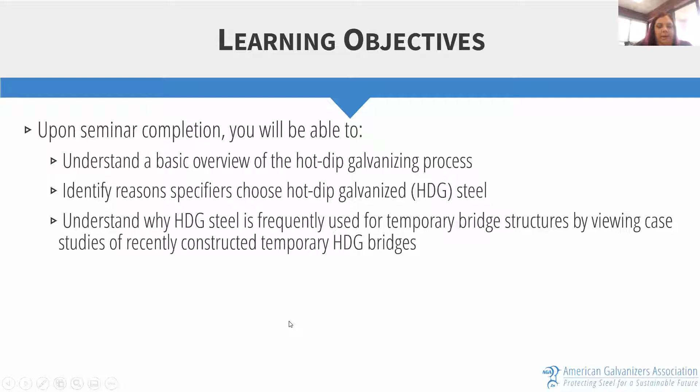It starts with surface preparation done within the galvanizer's facility. There are three major steps in surface preparation: degreasing, which takes off organic compounds; pickling, the primary cleaning mechanism, a mild acidic solution that takes off all mill scale and oxides - basically when it comes out of that bath it's at a near white metal clean.

Then the final step of surface prep is a flux solution, which does any final mild cleaning of contaminants on the surface since it was removed from the pickling bath, and more importantly puts a protective layer on the surface so no contaminants will form before going into the galvanizing bath itself.

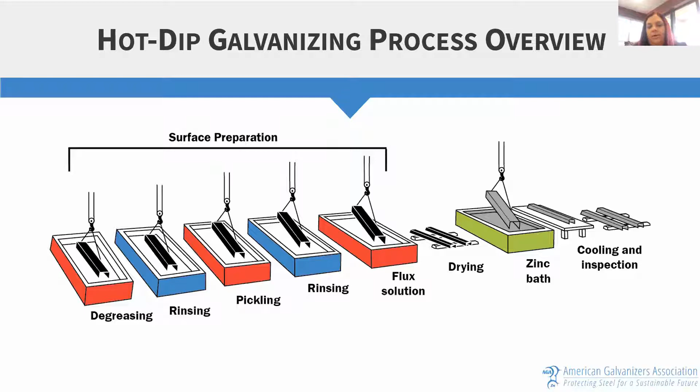A little bit about the galvanizing bath: it's heated to about 830 degrees Fahrenheit, required to be at least 98% pure zinc. The 2% of additives has limits but is to the galvanizer's discretion - the most common you'll see are aluminum, bismuth, and nickel, which help with things like the fluidity of the zinc, the shine of the coating, and controlling the coating thickness.

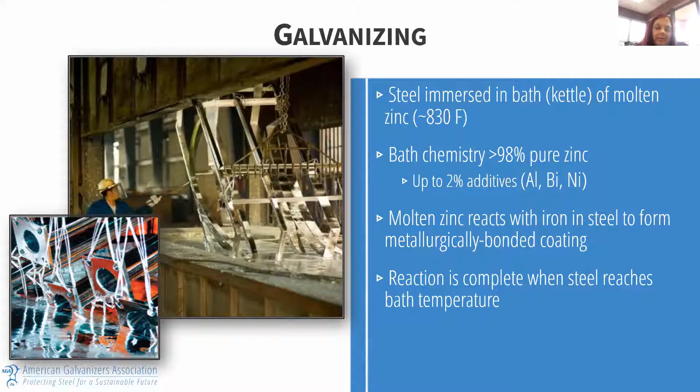While it's in the galvanizing bath, it stays in there until it reaches bath temperature, typically about 5 to 7 minutes. The kettle operator would know when the steel has reached bath temperature because the bubbling on the surface would dissipate. While it's in the kettle, there's a metallurgical reaction between the iron in the steel and the zinc to form the galvanized coating, which we'll talk more about as we go forward.

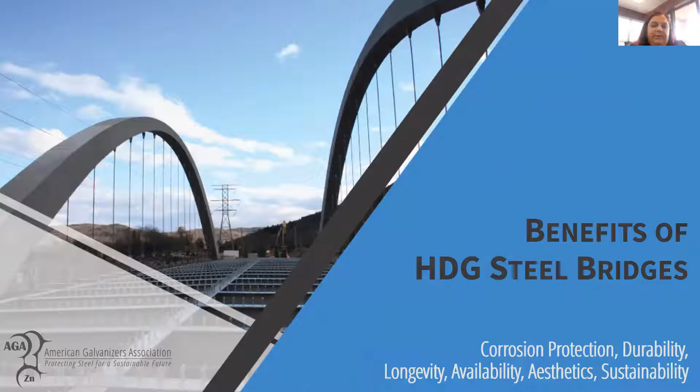So what are some of the benefits of using hot dip galvanized steel in bridge structures? We're going to talk about 5 or 6 big ones here, and we'll try to relate those to the temporary bridge structure as well.

As we talked about at the beginning, the biggest or most common reason hot dip galvanized steel is chosen is for its corrosion protection, and it really provides 3 levels of protection. It provides basic barrier protection that any coating would provide by isolating the steel from the environment. But more importantly, it provides cathodic protection, meaning the zinc will sacrificially corrode to protect the underlying steel - as long as there is zinc on the piece, it will corrode and prevent the steel below it from corroding.

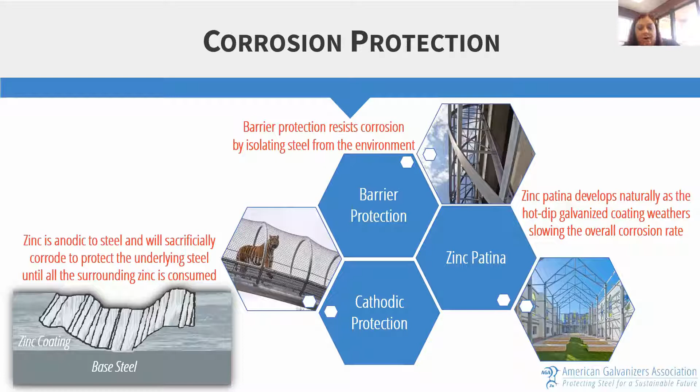But the real longevity of galvanizing comes from what's known as the zinc patina. This develops naturally as galvanized steel is exposed to wet and dry cycles in the environment, producing a series of byproducts on the surface - zinc oxide, zinc hydroxide, and zinc carbonate - which slow down the overall corrosion rate to about 1/30th the rate of steel in the same environment.

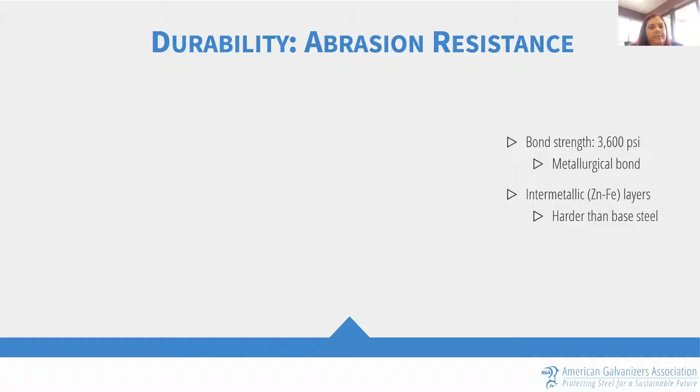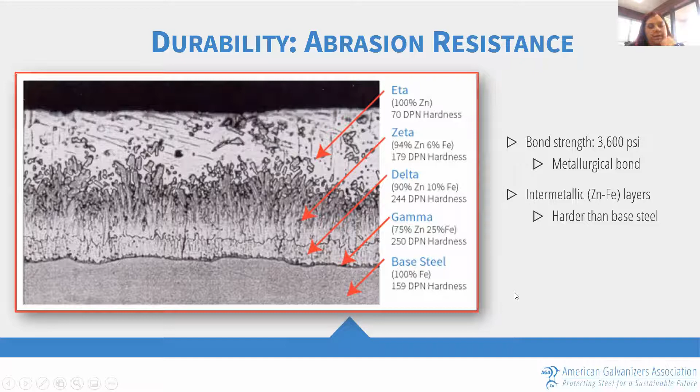Another benefit of hot dip galvanizing is its durability. There are a few different areas within durability that come into play. The first is its abrasion resistance. This has to do with the fact that the galvanized coating is not just a surface coating on top of the steel, but basically becomes a part of the steel and is intermeshed with the iron of the steel. This photomicrograph shows that the layers of the galvanized coating are a combination of zinc and iron. So we're not just sitting on top, but we're now intermeshed with the steel itself. That provides great bond strength, and the hardness of the coating is actually harder than the steel itself. So it's very difficult to damage, very difficult to hurt the coating or cause any sort of damage that would allow the underlying steel to be exposed.

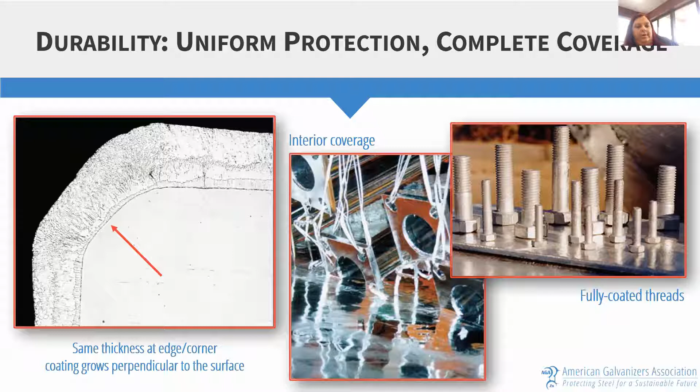Another part of hot dip galvanizing's durability that's important to understand is that it provides uniform protection and complete coverage. What do I mean by that? Well, basically, hot dip galvanized coating grows perpendicular to every surface of the steel. That means any of the corners or edges will have the same thickness as flat surfaces. Any interior areas, if it's a hollow structure, or threads of a coating, are going to be fully coated. So there's really no weak point for corrosion to begin or to attack the bridge.

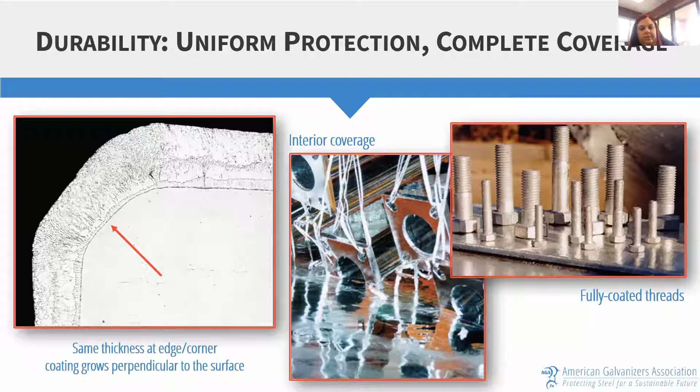As I mentioned at the beginning, a lot of the reason to use hot dip galvanizing is for its longevity. Even in a temporary structure, this could become important because sometimes our best laid plans don't work out how we expect. Maybe we thought the bridge was just going in for 5 years, but it could end up being there for 20 or 30 years, depending on the situation.

One of the advantages of using hot dip galvanized steel is that basically you pay for it up front, you put it up, and you can more or less forget about it. So if it's in a remote area that's difficult to access, you really don't have to worry too much about maintenance or closing it down.

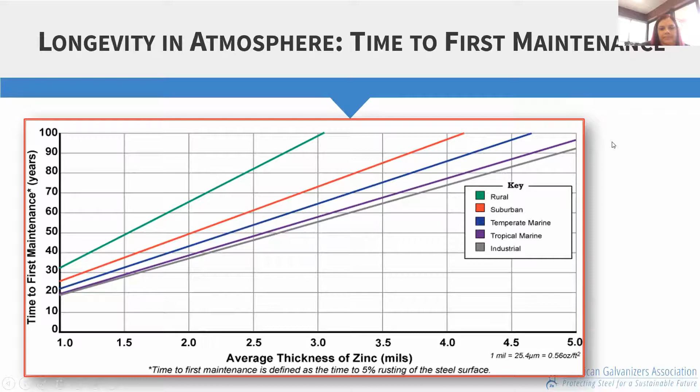Speaking with a group of folks involved in the forestry service, I know that sustainability is an important part of what you do and what you consider every day. So one of the things I like to talk about with galvanized steel is the environmental advantages it provides.

One of the biggest things, or the thing I like to start with, is that galvanized steel is made of natural and abundant materials that are essential to life. Zinc is the 24th most abundant element in Earth's crust, and iron ore is the 4th. So they're readily available to us and able to be used for this type of construction.

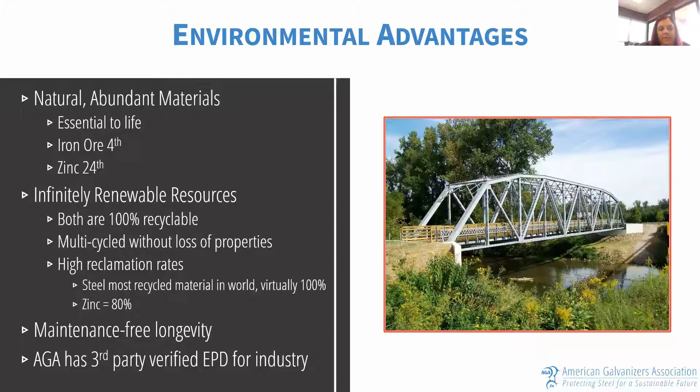In addition to those two major environmental items, that maintenance-free longevity we just talked about is also great for sustainability, because there are no VOCs or emissions coming off of that bridge while it's in place. There's no maintenance, so there's no need to bring out vehicles or other things to disturb the environment while it's in place.

If you wanted to get an idea of the life cycle of hot dip galvanizing, this is basically an abbreviated chart that shows you what you get. All of the raw material and energy input, or environmental impact, is really isolated in the production of the bridge.

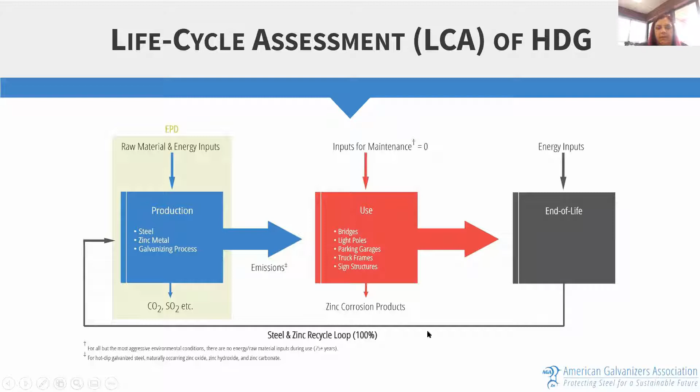When it's in use, there's usually no input for maintenance, no emissions coming out of it. It can just be out there for 75 or more years, particularly in a rural environment easily 100 years. A little bit of energy is needed when you want to demolish the bridge, but otherwise it just sits there and does its job. And when you take it down, it's 100% recycled, looped back into production, with no waste of materials.

Finally, there's a lot of versatility with hot dip galvanizing. First, it's important to understand that it's a factory controlled process that can be done 24/7, 365. There are galvanizers located throughout North America ready to help service this and provide the coating, so there's really no issue with turnaround time. We don't have to worry about temperature, humidity, or anything - we can just produce.

We talked about the abundant materials. It also provides some efficiency and safety, just as steel would in any case, but you can do more with less - the strength to weight ratio of steel allows you to span a longer length without a vertical column, things like that. So it really provides design flexibility for intricate areas where you're trying to build a bridge.

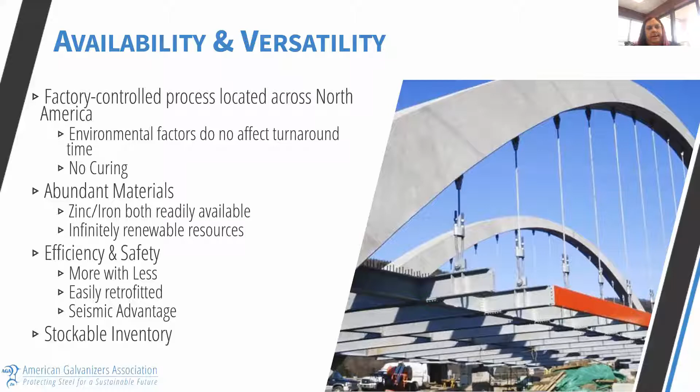But one of the best examples of galvanizing versatility is the last case study I want to show you - a 2-for-1, if you will. This is the former Fore River Bridge in Quincy, Massachusetts, put in 2002. The existing Fore River Bridge had serious damage and was actually closed to traffic because of it, or needed to close because it was not safe anymore or couldn't pass inspection.

Of course, this is a common byway and it was very necessary to have the connection there. So they used an Acrow structure to put up a temporary bridge to bypass this area until the permanent structure could be constructed. This was in place for about 15 years, giving you an idea of how long it took to decide on a path forward, demolish the existing bridge, and build the new one. If it weren't for this temporary structure, it would have been a very difficult 15 years for folks in the area.

But what's even more impressive about this particular structure is that in 2019, when this bridge was no longer needed and was going to be deconstructed, Jay Cashman, whose headquarters is right next to the edge of this bridge, decided to take all of the steel instead of having it trashed, recycled, or demolished. They took all the steel pieces, brought them onto their yard next to the bridge, and are now reusing the steel to build bridges for underserved communities free of charge.

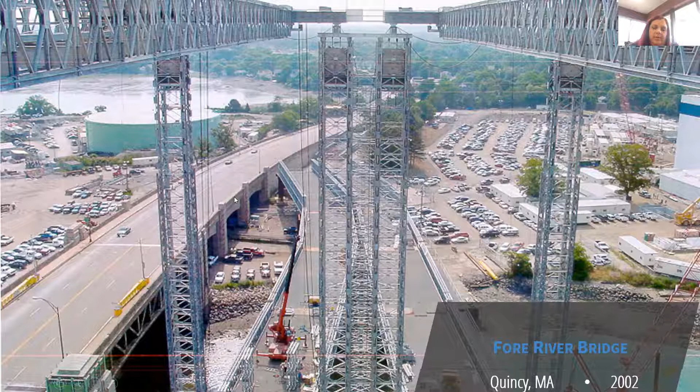So let's take a look at this video that shows where the new life of part of this Fore River Bridge is now. See if my video will queue up for you here.

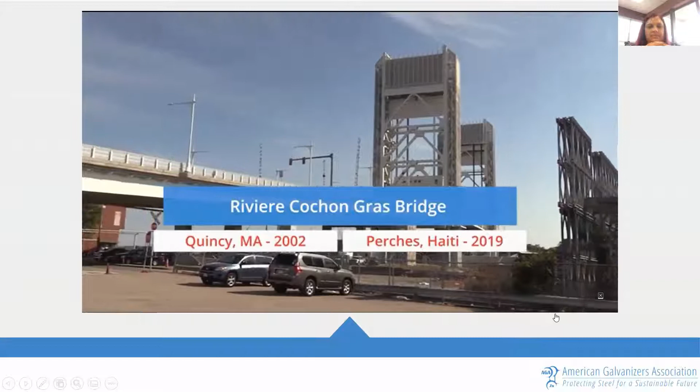My name is Jay Cashman. I'm the chairman of the board of Cashman Companies, located here in Quincy, Massachusetts. The company was started by myself in

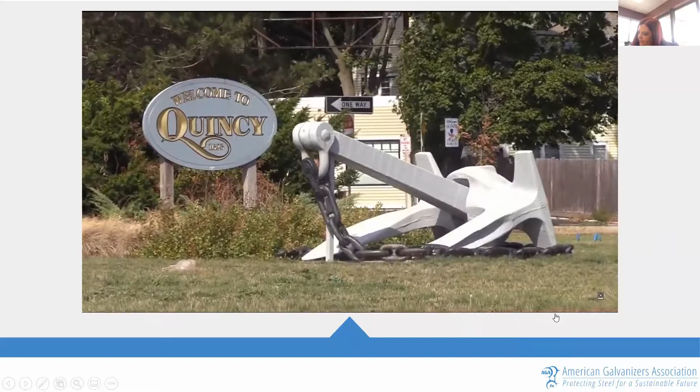about 1970, when I was in high school. Over the years, we built it into a multidisciplined, heavy civil, marine, dredging company.

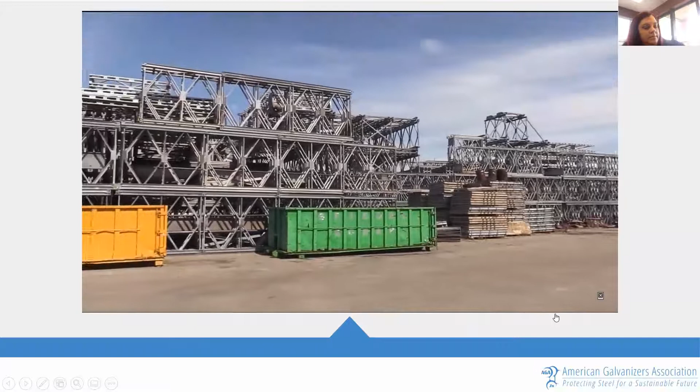We had basically done the demolition on the Fore River Bridge project, and there had been an Acrow bridge there for many years, so we had the demolition contract to take down the temporary structure and the remnants of the former bridge. The project was actually next to our headquarters. I kept looking at this bridge, and I said to myself, we have to find some sort of repurpose for it.

It had been scheduled in our estimate to just demolish it and send it to the junkyard to get the value of the junk. It was amazing - big, very heavily trafficked bridges were made of these structures, which I had like 2 miles of.

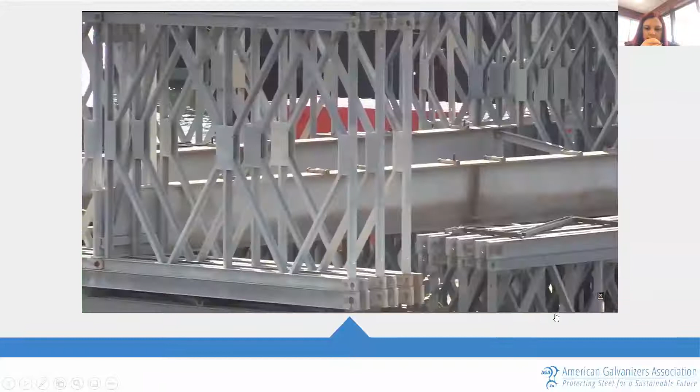I think it takes a lot of courage to actually get down there and get your hands dirty. Going down to Haiti and seeing people in poverty, maybe an abject poverty, the greatest poverty I've ever seen in the world, I said to myself, okay, maybe this is what I'm supposed to do.

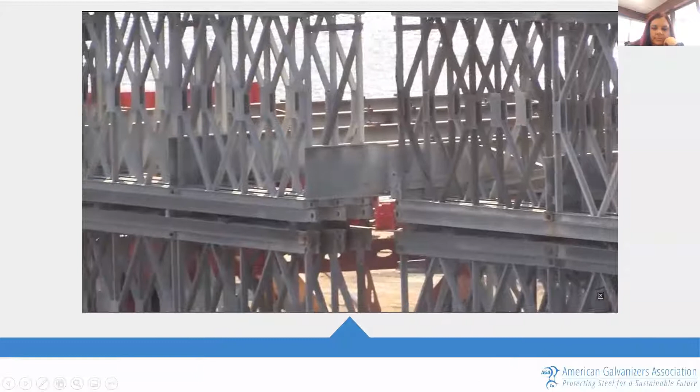So off we went. My name is Liz Turchia. I'm a project manager at J. Cashman Inc., and I am the co-director of the Cashman Family Foundation.

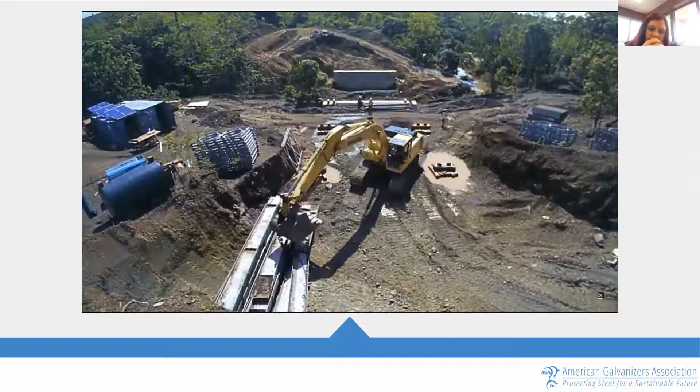They came into possession of all of this - several thousand linear feet of Acrow bridge - and in deciding what to do with it, we thought the best thing to do would not be to scrap it, but to use it again, because it's still totally serviceable. It has a lot of life left.

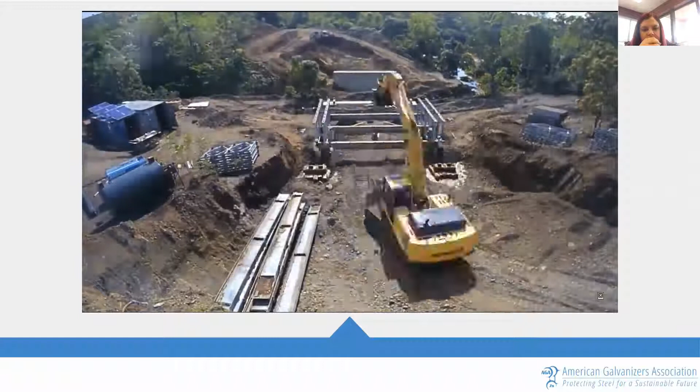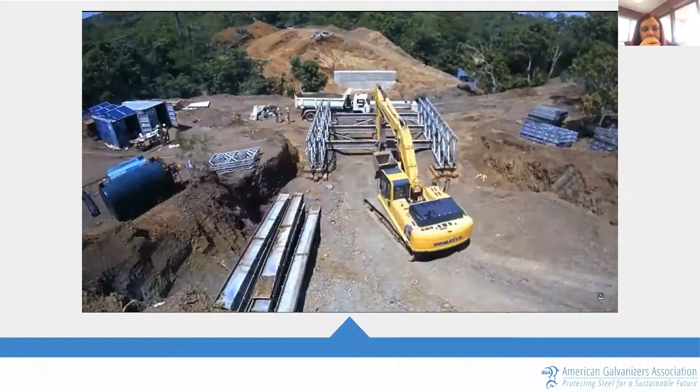So through our connections and our friends who already do work in Haiti, we got connected to some parties down there that are interested in infrastructure development, and that helped us develop the concept that became the Cashman Family Foundation. We're really kind of looking for places that'll never end up getting any attention.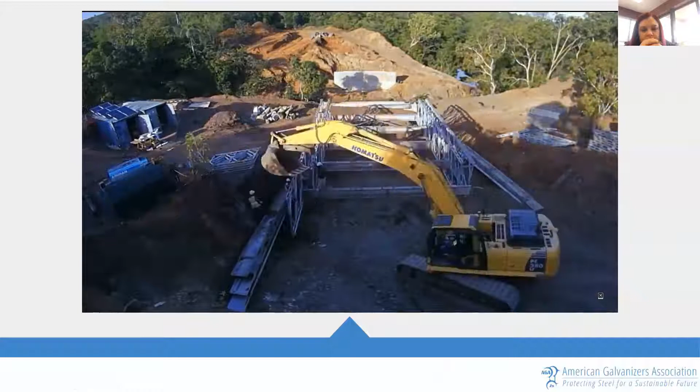That's kind of my goal at this point. That was on nobody's radar, and Liz found that opportunity. They've helped me navigate the social, economic, political dynamic of Haiti, which is, let's just say, complicated. At the very least, it's really complicated.

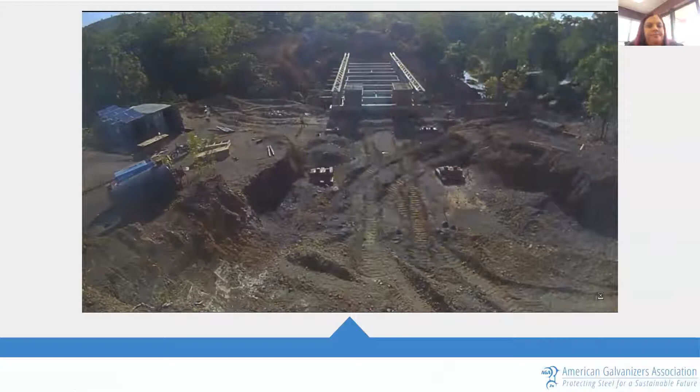Nobody's ever going to help these people, and this is something that I can really feel that we accomplished something. One of the compelling reasons to promote this program, or to keep these bridge sections as they were, was the fact that they were galvanized.

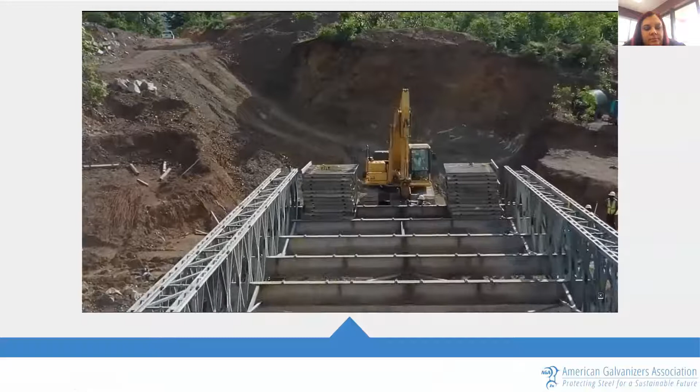Even after 20 years, there's very little delamination, there's very little oxidation that's taken place. The galvanizing stuck on it. Whoever did the job did a really good job. These bridges are just as good as they once were.

Generally speaking, I think that they're in excellent condition. It's amazing. I'm familiar with galvanizing from back in the 60s when I first started building bridges, and everything had to be hot dip galvanized, and it wasn't that way before.

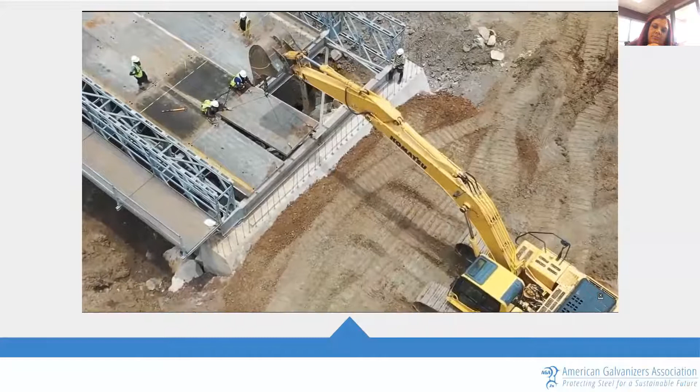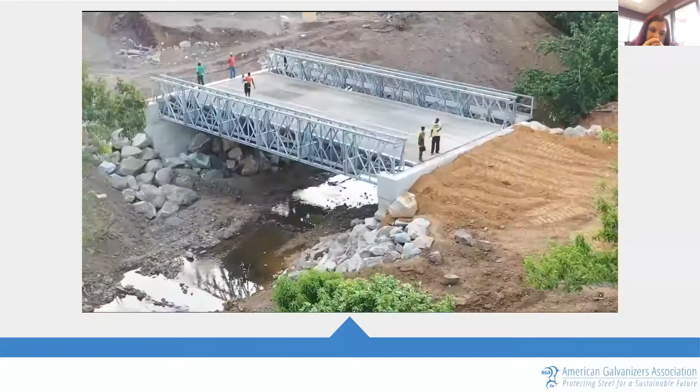And piers and all the bolts that we had were galvanized. We can go back to projects that we did decades ago, and you could still back those bolts off. And the fact is, if I was concerned about that galvanizing, I would have basically just sandblasted and repainted it - okay, I'll re-galvanize it, whatever - but the galvanizing was good.

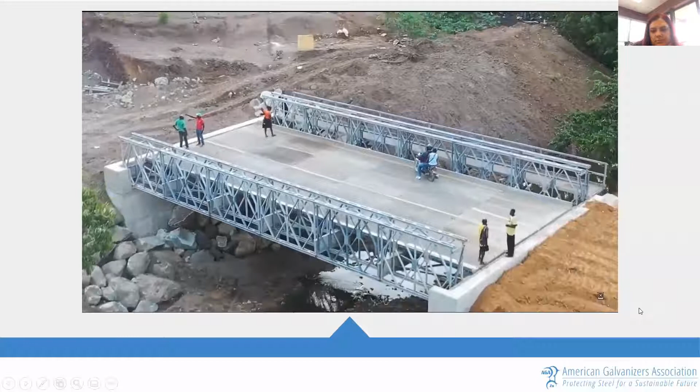I think that they'll get another 30, 40 years out of this thing without really much in the way of maintenance at all down there. My experience with galvanizing over the years, particularly around marine structures - it really kind of changed the world.

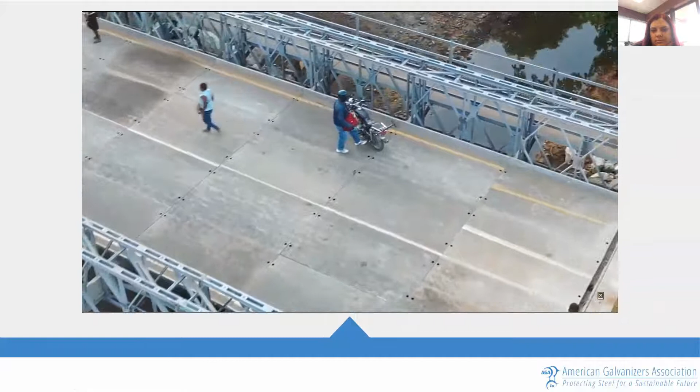So that's kind of the end of my presentation. I like to finish it off with that video because I think it really shows the opportunities for temporary structures and the reuse of galvanized steel.

So even if you were to put in a structure that you only needed for a few years, if you build with these modular structures that many of the manufacturers of the Short Span Steel Bridge Alliance can provide, it's easy to reuse that in a new location each time that you have a new need. So with that, I'll open it up to any questions that you may have for me.